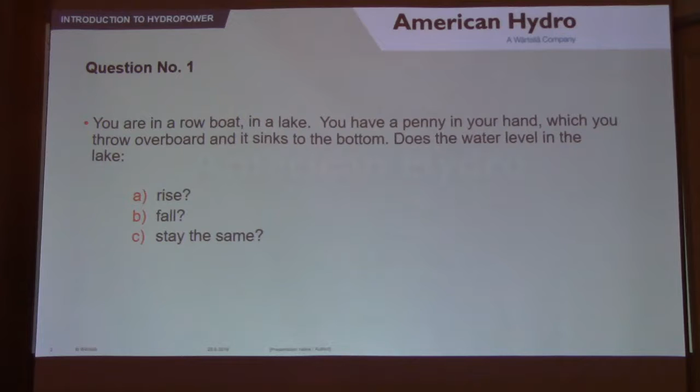Question number 1: You're in a rowboat in a lake. You have a penny in your hand, which you throw overboard, and the penny sinks to the bottom of the lake. Does the water level in the lake rise, fall, or stay the same? I'm going to give you a lot of time to think about that, and we'll actually get to an answer a little bit later.

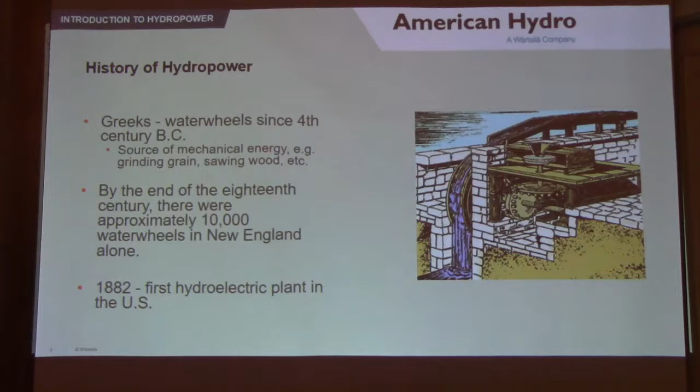I thought before we talk about American Hydro, we'd talk a little bit about hydropower in general. It's been around for centuries, not necessarily to generate electricity, but as a mechanical means of power. Since the 4th century BC, the Greeks used it for grinding grain, sawing wood, etc. And by the end of the 18th century, there were over 10,000 water wheels just in the northeastern United States. The first hydroelectric plant was developed in the U.S. in the early 1880s, shortly after the invention of electricity.

Hydropower around the world: there are over 11,000 hydropower stations, almost 1,400 gigawatts installed. If you're not familiar with the term, a kilowatt is 1,000 watts, a megawatt is 1,000 kilowatts, and a gigawatt is 1,000 megawatts—it's a lot of power. So 1,400 gigawatts is installed worldwide, equivalent to 1,700 units like those at Three Mile Island, just to give you an idea of the size.

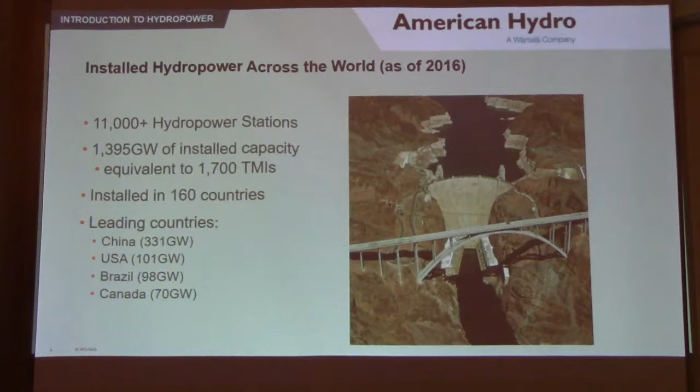Hydropower is installed in 160 countries. The leading countries are China, with the US second. China has far more than anyone else and continues to add to its base. The US is second but relatively flat in hydro growth—we'll talk about that. Brazil is third, and Canada right behind. Those four countries account for almost half of all installed capacity in the world.

Some well-known large projects: many of you may have heard of the large project in China called Three Gorges. That alone generates 18,000 megawatts. It's the largest single construction project ever undertaken, and it was very controversial because it displaced a lot of people, but it has been up and generating reliably for almost 10 years. Itaipu in Brazil is a very large project on the Paraná River between Brazil and Paraguay. And Grand Coulee, right here in the US, has almost 10,000 megawatts—a very large plant.

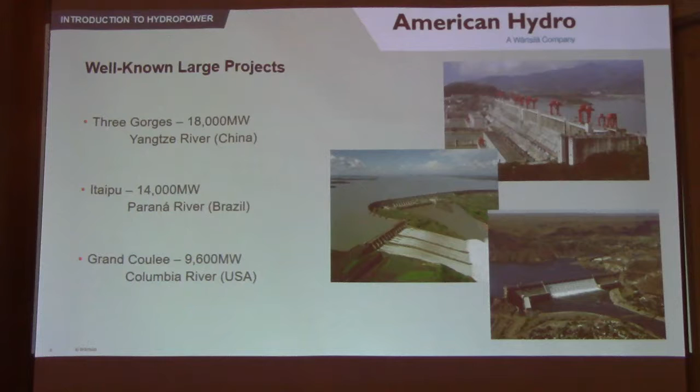I had a professor when I was in university who spoke kind of funny, and he'd always twirl his finger and say, 'Grand Coulee is the biggest block of concrete ever poured.' That was true in the 1930s, but it's no longer true, as these other projects have surpassed that.

What are the benefits of hydropower? It is still, by far, the world's leading source of renewable power. Wind is fast growing, certainly, but hydro is still the largest, accounting for 35% of renewable energy in the US. Wind, just last year, overtook hydropower in generation of electricity.

But hydro does something other forms of renewables can't really do: provide support to the electrical grid. Sources like wind and solar are intermittent, or unreliable—they need backup for when the sun doesn't shine or the wind doesn't blow. Hydro is excellent at that because it can respond very quickly to demands for power. There are also ways to store energy with hydro: if you have a large dam with a lot of water stored behind it, that's in effect a big battery, and when you need the power, you release the water to generate electricity.

Also, recreation is huge. I did a little checking—I don't know if any of you have heard of the Bassmaster Tournament or the Bass Anglers Sportsman Society, but in 2018 they have 36 tournaments scheduled, and 25 of them are at hydroelectric dams or the lakes formed by them. So I think the bass fishermen are very pleased with hydro.

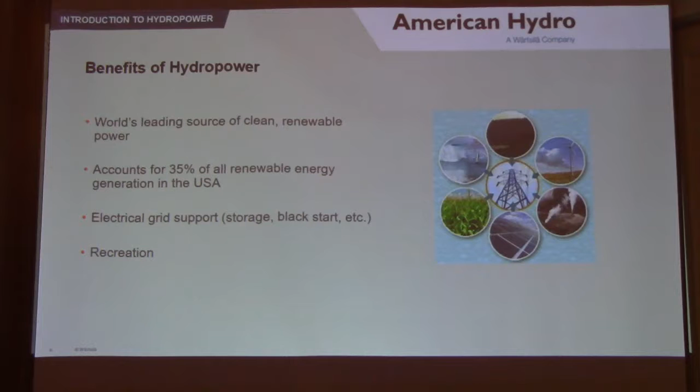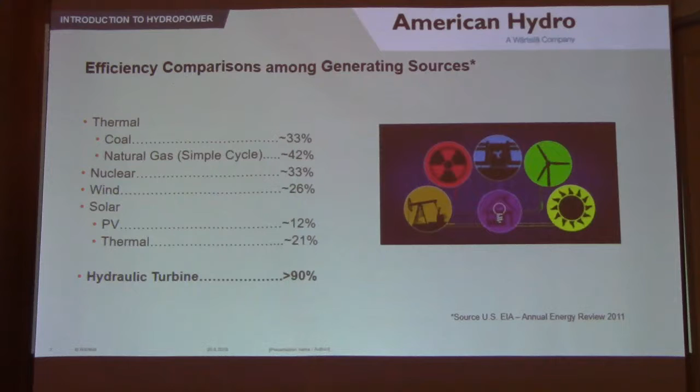This is just for comparison—I'll go through it quickly. I just want you to look at the efficiencies of generating power: what's the available power versus what you actually get out of each source of generation. Solar and wind are relatively low, thermal power and nuclear are in the 30s or so, but hydro is at 90-plus percent. So it's a very efficient form of generating electricity.

This is the result of a study performed by the National Hydropower Association. They say we now have 101 gigawatts of power installed currently in the US, and there are other ways to increase that. There's a goal of adding 50 gigawatts by 2050.

Starting in the lower right-hand corner: new stream reach means where there are no dams or structures on a stream, you may put a diversion structure in to collect water and run it through a turbine. In the upper right corner, new development of existing non-powered dams—there are 80,000 dams in the US already, but only 3,000 have power associated with them. That doesn't mean they're all able to economically generate power, but the potential is about 5 additional gigawatts.

New pumped storage is really the means used for this—I've talked about storage and balancing some of the other renewable sources of energy.

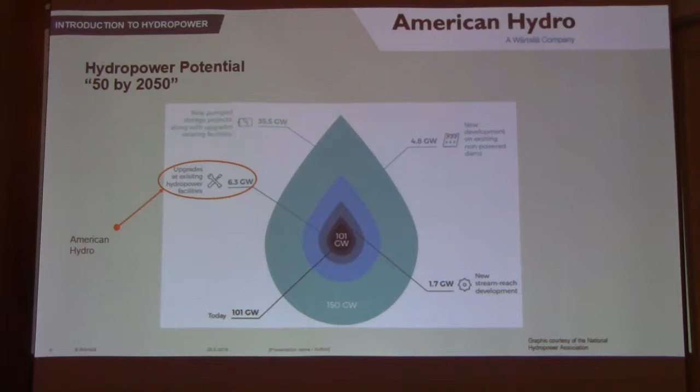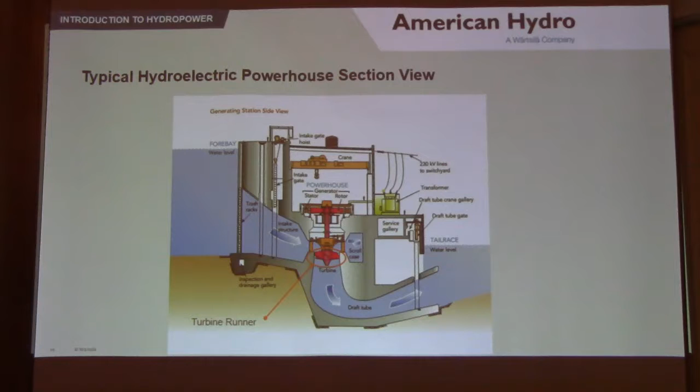I don't want to get too technical, but I want you to understand what American Hydro does. This is a section through a typical hydro plant. The far left, in blue, is the water behind the dam. It comes down through the intake structure, goes through the turbine and turbine runner, and then out through the draft tube into the water below the dam. The water going through the turbine makes it rotate, spinning the generator, and that's what creates the electricity.

So what's a hydro upgrade? I mentioned it briefly already. A lot of the plants in that 101 gigawatts were installed in the 50s and 60s, so those plants are now pretty old, 60 to 70 years. A lot has happened technology-wise in that time frame.

Through what's called computational fluid dynamics, a type of analysis of water flow, we can come up with designs that are much more efficient than what was done back in the 50s and 60s. So replacing the key components, like that turbine runner I circled in the previous slide.

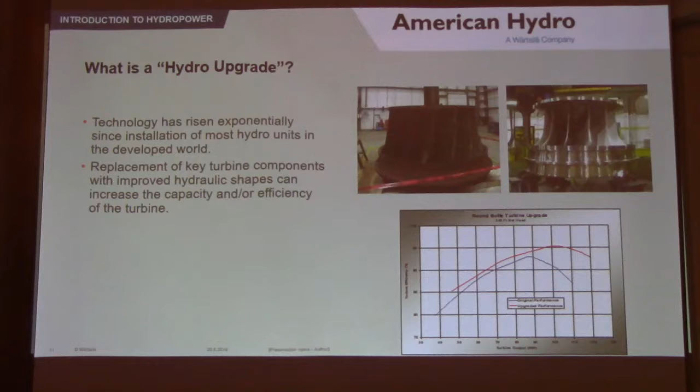This curve shows power on the x-axis and efficiency here. It shows that by replacing the runner, you can go from a curve that generates a certain amount of power at that efficiency level to one that generates more power and more efficiency. So that's the nature of American Hydro's business, right there in a nutshell.

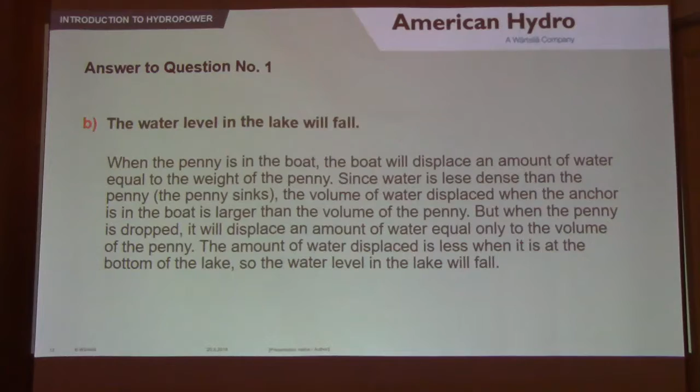Okay, answer to question number 1: the water level in the lake will fall. How many got it right? Two. We won't ask you to take any more physics tests. I'm not going to explain it, but it's there if you want to know. It's basically weight versus volume, and I'm not going to explain it, it takes too much time. It's all there.

Okay, American Hydro. This little history was done by Reverend Stephen Nicholas, who was here about 2 years ago, maybe a little less. He went through the history of S. Morgan Smith, and this really all pertains to that same history.

York has quite a history with hydro. The first turbine was manufactured around 1870. S. Morgan Smith was founded here in 1877. Allis-Chalmers purchased S. Morgan Smith in 1959, and then Voith purchased the hydro turbine business of Allis-Chalmers in 1986. That's when 4 engineers decided the United States deserved to have a U.S.-owned hydro turbine manufacturer, and that's when American Hydro was formed.

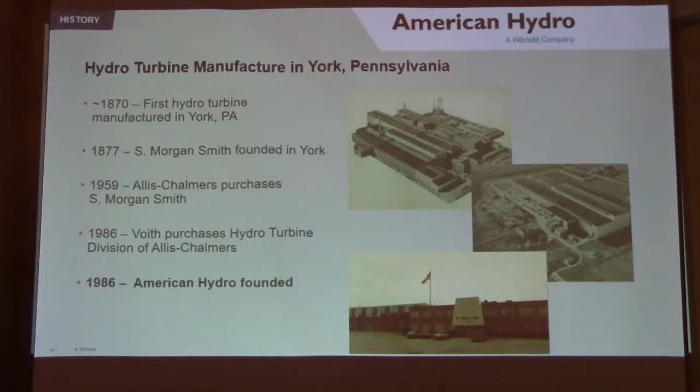This is just a quick history. The manufacturing facility we're in today was built in 1991. The company was formed in '86, and 5 years later they built this manufacturing facility in East York. The Weir Group bought it in 2010, and then Wärtsilä from Finland bought it in 2016.

Okay, so we've been around 32 years. We employ about 170 people, and we have 3 shifts of operation in our factory. Since the initiation of the company, we've upgraded over 700 turbines. In the 32 years, you can do the math and figure out how many that is. But believe me, it's a lot.

The thing that's really great about hydro is it's all different. These are 3 different types of hydro runners. On the top, we have what's called a fixed blade propeller. The bottom right is a Francis runner, named after a guy named Francis who developed it back in the 1800s. And a Kaplan runner on the left, which is an adjustable pitch runner that's very flexible in its operation.

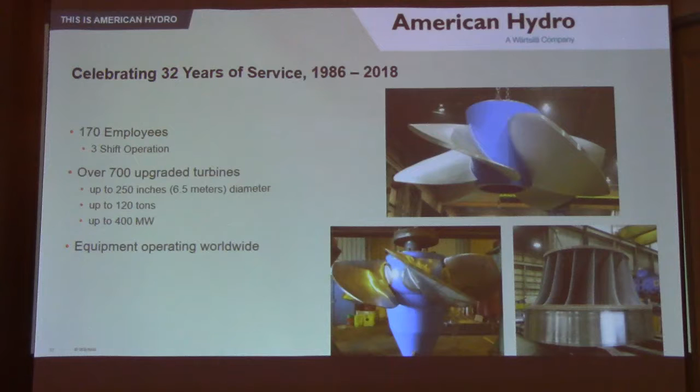We build machines that have runners up to 250 inches in diameter, weigh up to 120 tons, and have generated up to 400 megawatts individually. So we can do anything up to that size. We also build runners that are 30 inches in diameter, so quite versatile.

What do we do? Full service modernization of a hydro unit. Engineering is really key for us. Everything we do is based on our engineering experience and our tools. We build new components, new runners to try to improve the performance of the machine, and other components that may have worn out, and rather than rehabilitate them and redo them, they get replaced. We do existing component rehabilitation, which covers all the other components of the turbine. We rehab those, and then we also do the field work associated with them to take a unit apart, replace the components, and put it back together.

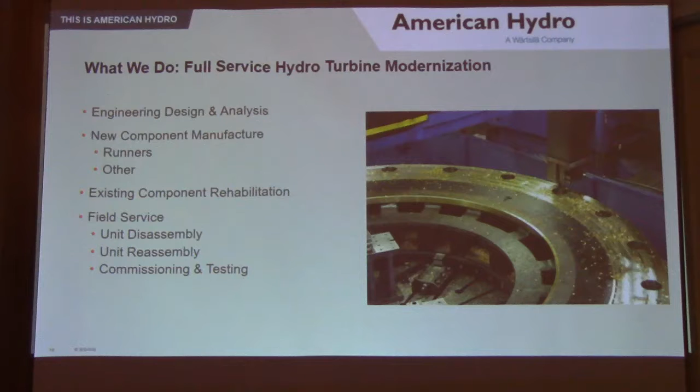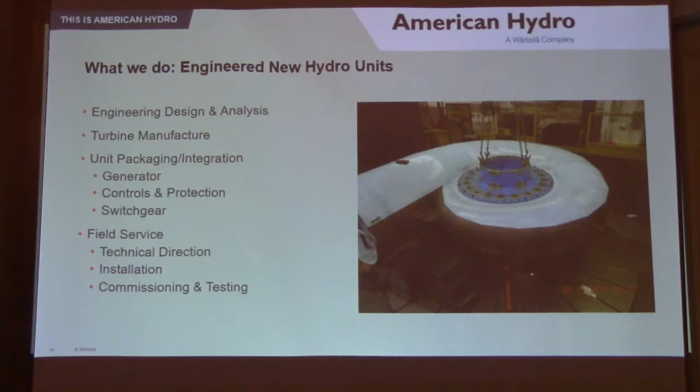We also do some new hydro. We don't do a lot of new. If we have a customer that has a particular need and it requires some engineering, we will do that work. We don't just go out and try to sell new units. There are lots of companies that do that, frankly we can't compete with. Our niche is this upgrade of existing units.

As I said before, driven by engineering - this is really the basis of our company. The hydraulic design aspect is designing the shapes of the pieces that touch the water - all the shapes as the water goes through the turbine, primarily the runner. We use computational fluid dynamics, some of which was developed internally, and we also use some commercial software that's out there today.

We do proof of our designs sometimes with scale model testing. We'll build a 12 to 15-inch model, fully to scale of the hydraulic shapes, and test it in a laboratory to see what the performance is. Then we can correlate that to our tools that also predict the performance of the machine.

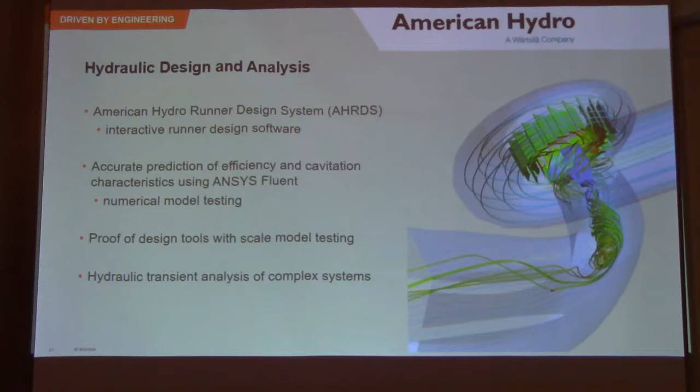We also do mechanical design. There's a lot - we have to make sure that the thing's going to hold up. It's under a lot of load when it's operating, and we have to be sure it's not going to crack, not going to destroy itself. So we do a lot of mechanical analysis just to ensure that it's going to stay together. And sometimes there's compromise between the hydraulic design and the mechanical design, because we may not be able to build the optimum hydraulic design structurally.

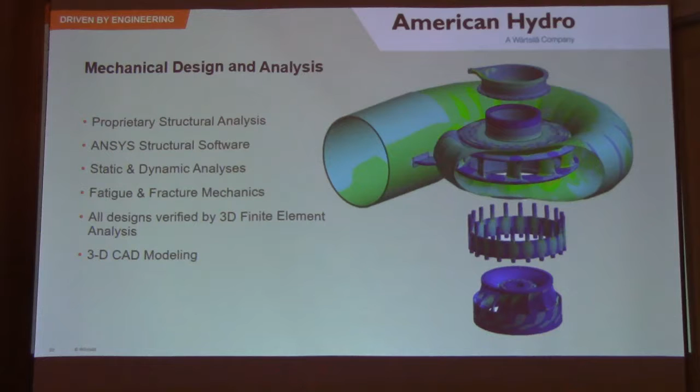One thing I want to say about our engineering is this really draws a lot of people to our industry. I already mentioned there's a lot of diversity in the types of machines we do, but I can honestly say we have never built the same turbine twice, unless there are sister units in a plant. Everyone is different, so it's exciting for the engineers to apply these tools. I call it like gaming design - we're using tools in our design that are very interactive and very interesting for the engineers.

We also do what's called systems engineering, where this is stuff we don't manufacture but is part of a hydro unit - like a generator, the control system for the unit, balance of plant protection, and things for the unit. These are things we don't build, but our customers demand them of us. So we have to have at least the knowledge to go buy them and ensure that we're protected with what we're buying and that the customer is getting what he wants.

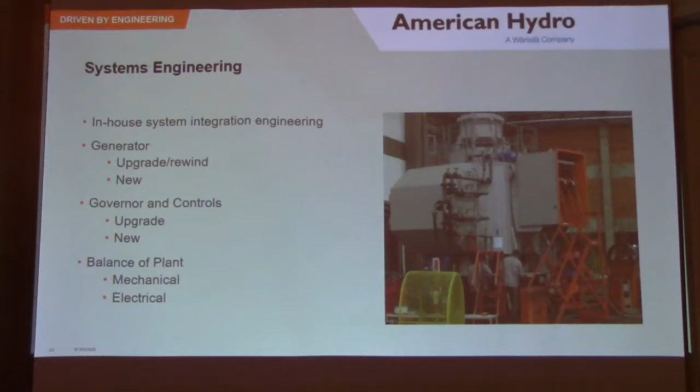On the manufacturing side, our facility on Stonewood Road is 100,000 square feet. We are able to lift 200 tons in that facility. We have a 40-acre campus, and we actually have soccer fields set up that we allow local teams to use.

We are dedicated to turbine manufacture. We're not a job shop. We don't do a bunch of different things. We just do hydro. And we have complete fabrication, meaning the bending of the steel, the welding of it, and then machining, which is putting it on big tools to get the dimensions to be exactly right. And all of that is done with computer numerically controlled tools.

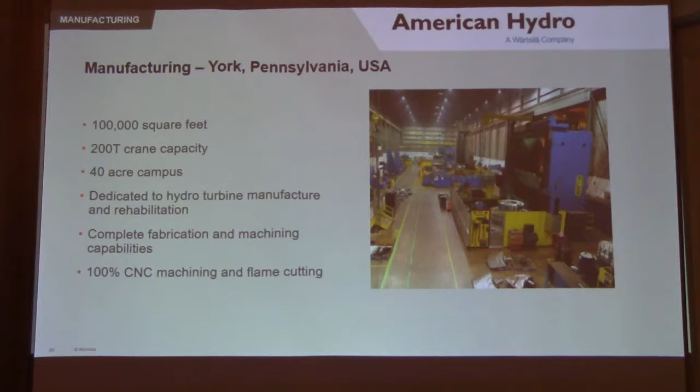It's a highly integrated system. For instance, a runner blade, one of those blades, when we manufacture it, we don't create a drawing. It goes directly from the computer terminal that the engineer has used to design it to a computer terminal at the machine tool, and the work is done without even a drawing. So I just wanted to point out this is also a key aspect of our manufacture.

This is a blade that was cut out of plate steel, heated to 1900 degrees Fahrenheit, and then it's put in a former that presses it and makes the shape. The formers are machined very exactly to the design of that shape, and that really is our method, our niche of manufacturing turbine runners.

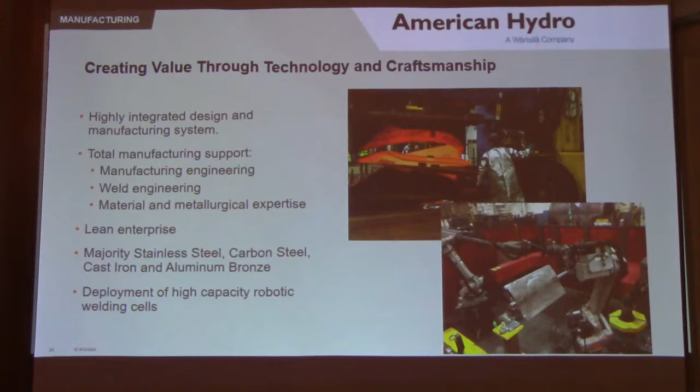We also have some robotics that we use, and we're looking at more robotics. But we have total manufacturing support with different other types of engineering. A lean enterprise, I imagine some of you are familiar with that term, which is primarily waste elimination, finding waste in your processes, in your inventories, all types of different wastes. We work primarily with stainless steels, carbon steels, cast iron, and a material called aluminum bronze. But mainly stainless steel is what we work with, and I mentioned the robots already.

Hope you don't mind it a little small, but this is a video of our manufacturing operation.

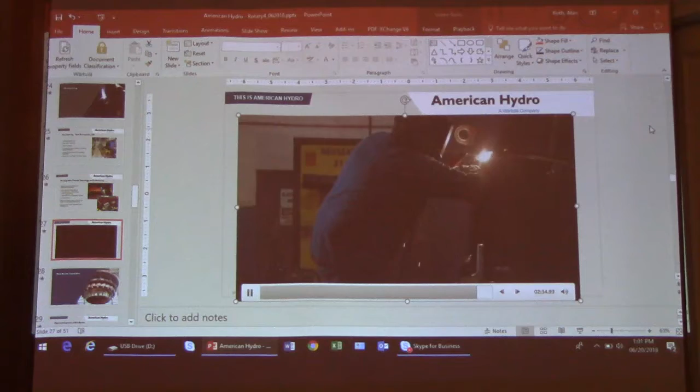Okay, so that was just intended to give you an idea of the types of operations that we do and the size, some of the sizes of the equipment that we work with, and again, the differences of the equipment that we deal with.

Then, we built all the equipment and it's time to put it in the field. We actually go to the sites and we assemble crews, and we have to disassemble the units, put the new equipment in, and reassemble it.

Safety is obviously our highest priority. It's more important than anything, but obviously we have to get the work done too. So we have very integrated scheduling and planning, and we can just provide a person to supervise someone else to do the work, or we can do the work ourselves. And there are lots of different things that we get involved with in the field, including the testing of the machines and what we call commissioning, which is making sure it's operational, commercially operational.

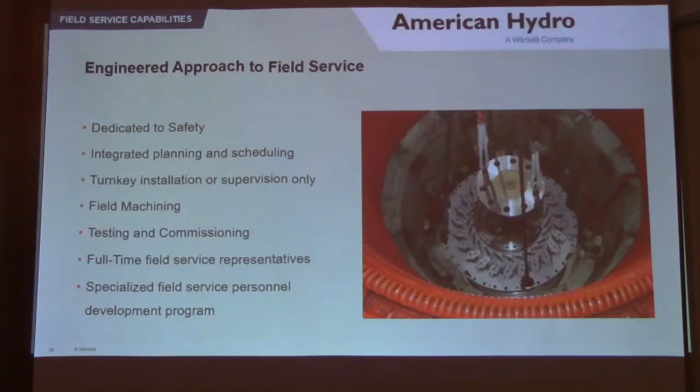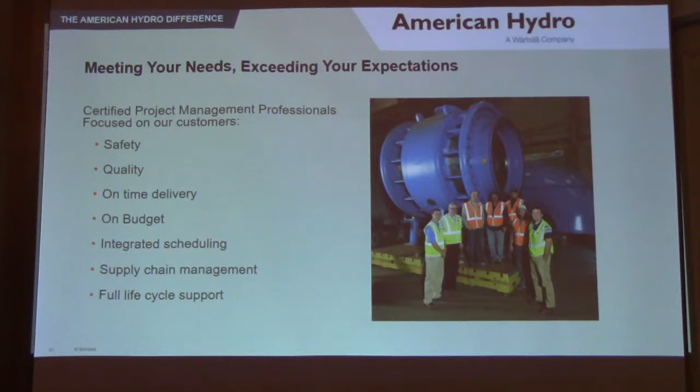Okay, what makes us different than our competition? I mean, really, it's how we deal with our customers. And we've heard this over and over again, people like working with American Hydro. We really work hard to create deep customer relationships. And we focus really on safety. Quality is critical. On-time delivery is vital. On budget is important to both us and our customers. Again, scheduling gets involved, integrated scheduling, meaning the manufacturer, the field work, the customers, other contractors on site, all integrated into a schedule. Supply chain, and then providing support after we've delivered the equipment and installed it as well.

We are certified. In fact, we just went through a quality audit last week and got certified to the newest standard of these three standards: ISO 9001, ISO 14001, which is environmental and occupational health and safety, and OHSAS 18001.

And also, we take pride in the fact that we are really a family company. We're part of a much larger, $5 billion corporation today, but we're 170 people family in East York. And this is just a piece of that. We've got 9 multi-generation families that work for us, where we've got, in fact, one of them is a father and 2 sons. And it's wonderful to see that family environment, and we really try and nurture that in our business.

Social responsibility, you know, the community's done a lot for us, and so we like to give back. One way is our Casual for a Cause program, where every quarter our employees pick a local charity, and we set a goal of contributions. If we reach the goal, the company will match it, and the executive team will cook a lunch for everyone - that's the office and all 3 shifts, so we do it 4 times over a day or a day and a half. In the last 4 years, we've contributed over $22,000, which speaks to the generosity of our employees.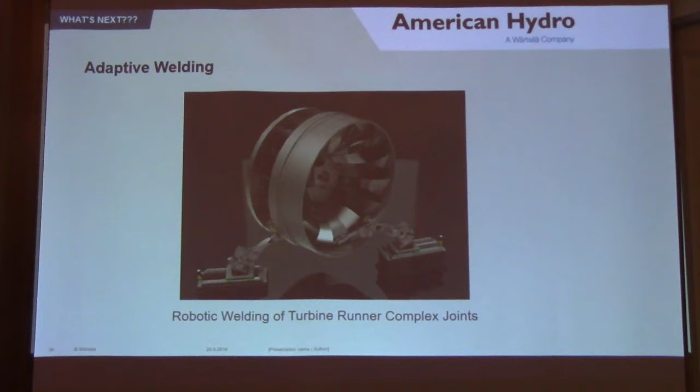For us in York, our growth is going to come from keeping up with technology. One thing we're looking very seriously at right now is what we call adaptive welding - that's where robots would come in, trace a joint that needs to be welded, then actually do the welding, continuing this back and forth. It would be an incredible increase in productivity and efficiency in building these machines. People say, well, what happens to the employees doing that manually today? They will find jobs running these robots, involved in different aspects of our business. The workforce will change - it's inevitable.

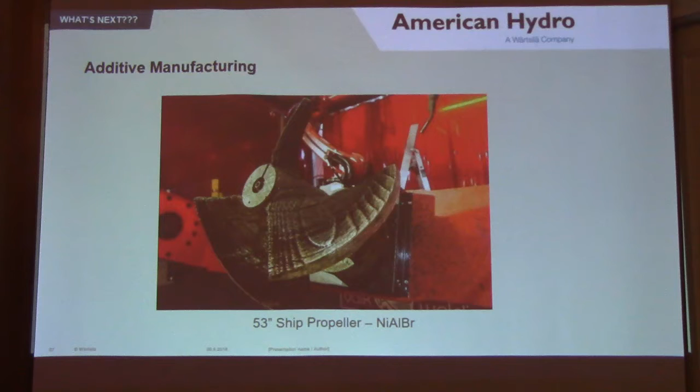Another is additive manufacturing. This is a picture of a ship propeller - we didn't do this, but it's what we're talking about, taking a runner that's actually built up with weld. You've all heard of 3D printers - this is essentially 3D printing with weld material, building a shape up from nothing, just with weld material. Then you'd need high-speed 5-axis milling to take all the roughness out of that welded surface and make it perfectly smooth so it would be highly efficient. This is where we're headed in York, improving the technology that we have right there.

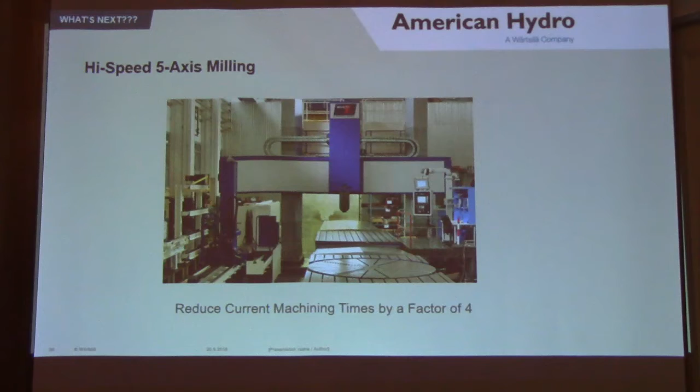And I suspect - well, don't suspect, it will certainly - ensure jobs for our company for years to come.

So in closing, we're celebrating 32 years. We do provide products of the highest quality. Again, back to engineering - very creative and always different, always challenging, which our engineers love. We're focused 100% on our customers' success, because if they're successful, we'll be successful. We have direct contact with our customers before projects are even envisioned, while they're being developed, while they're being executed. As a service company, we want to be there when they need us, and our entire staff is focused on their customer relationship.

So I just want to close by saying, it's been 42 years since I joined this business, and I remember my first day, my first assignment. I've had a lot of interesting assignments over the years, but nothing has been as rewarding as leading this company, American Hydro, in the last 3 years. The dedication and craftsmanship of the people we have working there is beyond anything I've experienced in my career. That's why I'm also sure the company is going to continue to succeed. So thank you very much.